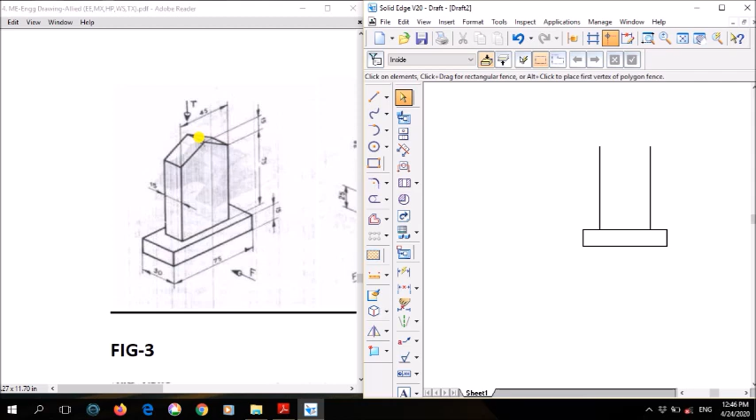So we have drawn this end and we have drawn this end. So now important thing is we need this part. We need this part. So what you can do is, using thin line now.

So this 75 line, its center point will be 37.5. At 37.5, mark a point, and from there, using thin line, draw a line. Now you can see here, it is 75, and again above it they have given 15. So add 75 plus 15, total it will be 90 mm.

So from the center point, here 75 center, it is 37.5, mark a point there, small point, and from there draw a thin line of 90 mm. Draw a thin line of 90 mm.

So now using thick line, join this part here, and draw from here. Using thick line, draw from here to here and draw from here to here. So after you finish this drawing, you just rub this center line. We don't need it.

So this is your front view. In front view, this plane is visible and this plane is visible whole. So we have drawn the front view.

So next we'll draw the right view. This right view is drawn on the left side. So before that, using thin line, draw the axis line. Leave a sufficient gap here and draw the axis line. Same way, draw the axis line from here to here. So like this, draw the axis line.

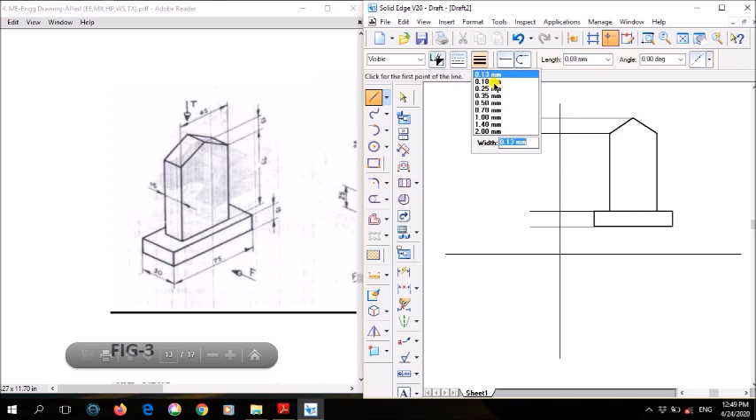So after that, first we'll draw this base. So this base, using thick line, draw the base. Its height is nothing but same as this height, 15 mm. So from here you draw above 15 mm.

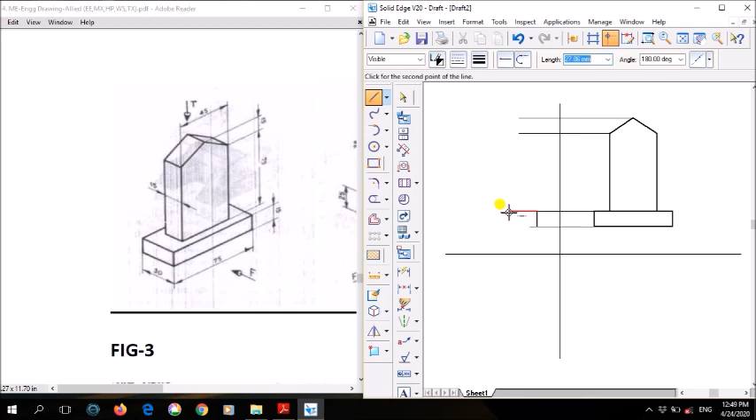So above, draw how much? 15 mm. Okay, and to the left, now I've started from here, I've drawn 15. So to the left, how much is it? 30 mm. So to the left, draw 30 mm. Again downwards, how much? 15, and finally join it.

So this you have to draw using a thick line. Clear? So next, after this, how much is this width? 30 mm. So we have drawn this 30. So above that we have a rectangle, another rectangle of width, how much? 15 mm.

So how to draw that now? Again the same way as earlier. So this is 30 mm, this is 15. So 30 minus 15, how much is it? 15 mm. So 30 minus 15, the answer is 15. So here this gap is how much? 7.5, and that side gap is 7.5.

So what you do, again the same way as earlier. Okay, from this corner here, draw a line or mark a point at 7.5 mm. Okay, so at 7.5 mm here, mark a point. Okay, 7.5, what you do is mark a point. Okay, so from here, okay, I'll just zoom here.

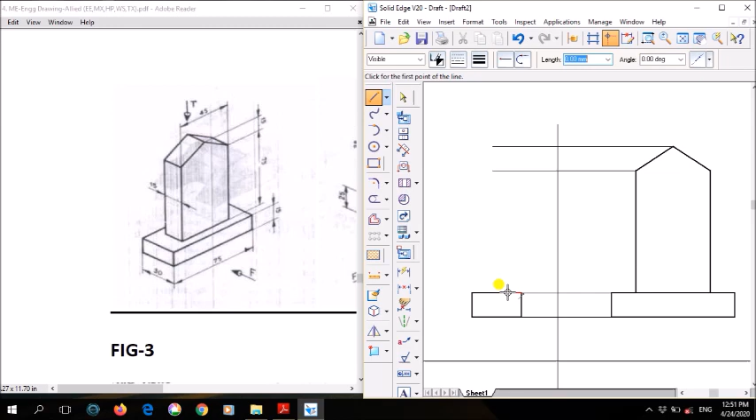Okay, so now what I did is, from here, okay, from this corner, on the left side at 7.5 mm, not centimeter, 7.5 mm, mark a point. Okay, and from there, what you do is you extend the line up to this line. Okay, you draw a thick line up to this line.

Clear? So after that, we have drawn fully from here 75 plus 15, that is total 90. We have drawn it. So after that, this width, how much is it? 15 mm. So to the left, draw 15, and finally just extend it downwards.

Okay, so from here, what you do is just mark a point at 7.5. From there directly you draw a line here, and from here draw a line using a thick line of 15 mm, and the same way extend it downward. Clear? So this is your side view.

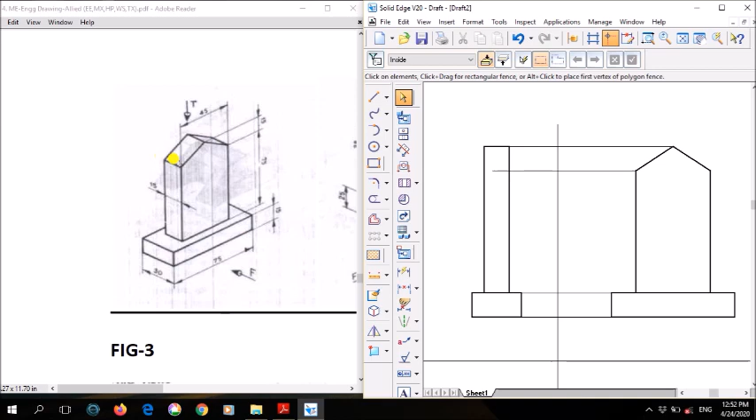So there is another view. Okay, so there is another important thing you have to remember when you are seeing from the top, sorry, the side view. So this plane here is different and this plane is different. So at the line here where the two faces are meeting, this line should be dark, from here to here it should be a dark line. So like this. Clear? Okay, so this is your front view, this is your right view.

Okay, so next what we'll do is draw the top view. Okay, so two views we have drawn. So what we'll do is finally draw the top view. So I'll just zoom this.

Okay, so now next we'll draw the top view. So what you do, using a thin line, is extend these lines downwards. Okay, so this point again, this point here, after that here this point downwards, and this point from here to here, and finally from here to here downwards. Clear? So now we need to draw the top view.

So in the top view, this plane, the bottom base, is visible, that is 75 by 30, and this plane is 45. Okay, so here you can see there are two faces visible. So these two faces are divided at a center point. You will get a line like this. Meaning you need to draw two smaller rectangles, and its length or width should be how much? That is 45 mm. Okay, so what you have to do is the same way as earlier now.

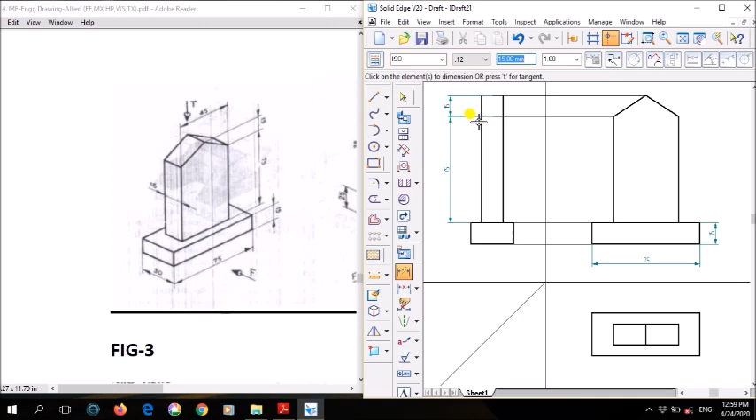Show this dimension. Make sure that whatever dimension lines or dimensions you are showing, these are on the straight line. So if you are showing two dimensions of different height or length, those dimension lines should be in a straight line. And whatever the distance is there, this distance should be of 1 centimeter or 10, same way here 1 centimeter or 10, same way here 1 centimeter or 10.

So we have shown here 75, 15. So next, this height, this width, how much width is there? Same way, draw an extension line here, draw an extension line here, and show the dimension, how much it is, that is 30. Same way now we need to show this, what is this, how much it is, 45.

So same way now, draw an extension line upwards, outwards here. You can show it here or you can show it downwards. Draw extension line here downwards, draw an extension line here downwards. After that show the dimension, how much it is, 45.

Same way we need to show this 15, we have not shown here, so we'll show it here. Same way, extend the line here this side, extend the line here this side, that is your extension line, and show the dimension. So from here this gap should be 1 centimeter, from here this gap should be 1 centimeter.

So like this, all your dimensions should be split into 3 different views, so that whatever dimensions are there, don't go show all the dimensions in one view. It will be very difficult to read. For that reason you need to split the dimension into all the 3 views.

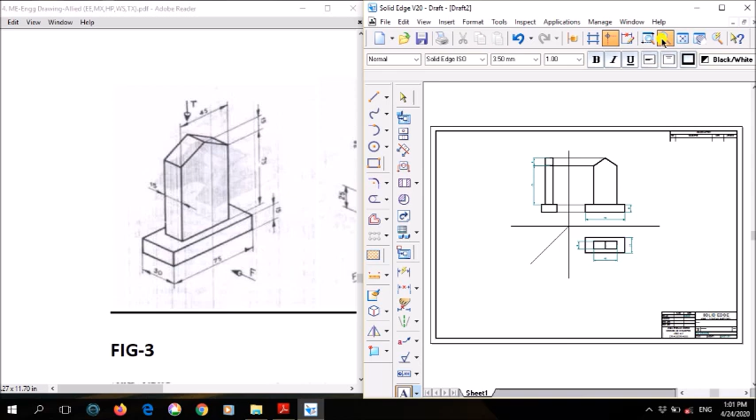Once you finish assigning the dimensions to all the views, the final thing you have to do is writing the views. I'll just zoom it so that we can write the views. So the final thing is you need to write the views.

So here this one is your front view, and then this one is your top view, and finally this one is your right view. So right view is drawn on the left side or left plane, and left view is drawn on the right side. Once you complete all the drawings, the second thing you have to do is the dimension.

And finally writing the views, so like this your drawing will be complete. And make sure this dimension line is there, you keep it, make sure that you write an angle here, how much it is, 45 degrees angle here.

So like this it is 45 degree, you just show it here, 45 degrees line. So just rub those extension lines because they get collided with this dimension line, and it will be very difficult to read the dimensions. So this is your second problem. We have completed the second problem, the front view, the top view, and right view.

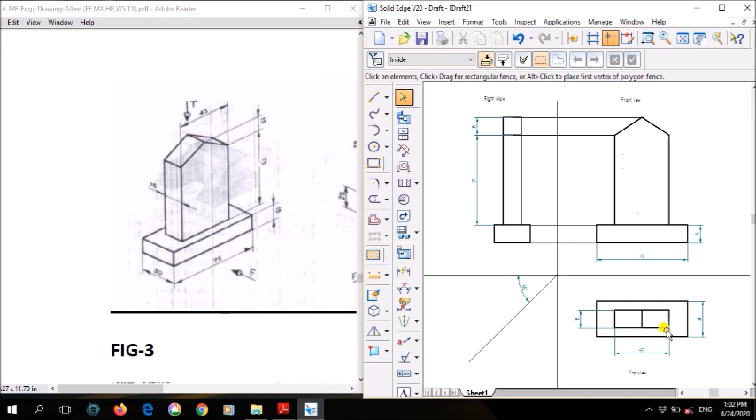So in the next video we'll go through another type of problem. Thank you.